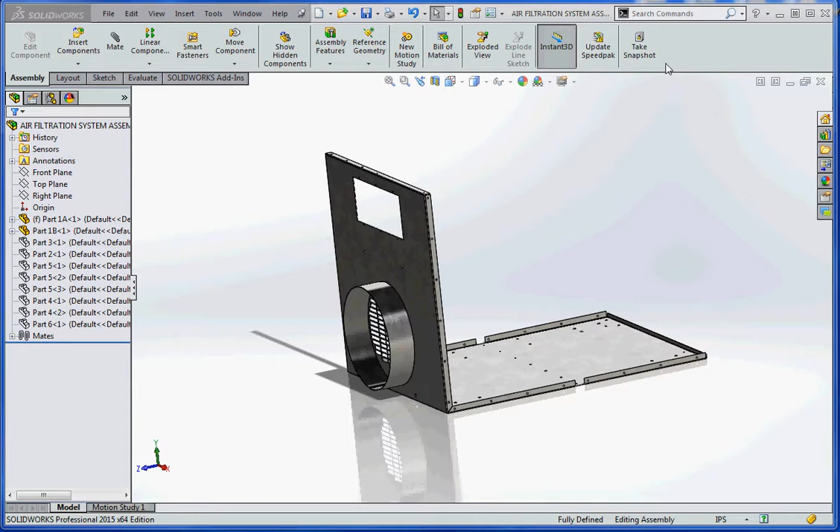Hi Matt, we're back. This is a video of the Air Filtration System Assembly that I put together and sent to you a little while back.

I just want to show you some of the parts and how I put this together. I think you've probably seen this part - I put it together a few weeks ago for you and you took a look at it. I went ahead and redid it and put it in SolidWorks 2015 and cleaned it up a little bit.

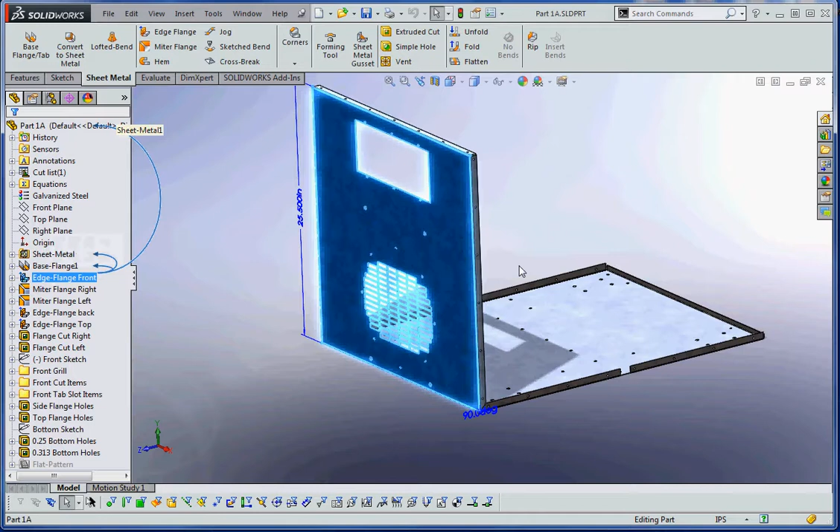I started with the sheet metal part, the base flange down here, then I put an edge flange for the front piece. Then I did a miter flange on both the right and left side to get that in there. I think with the miter flange, it does give you a nice little cut over here.

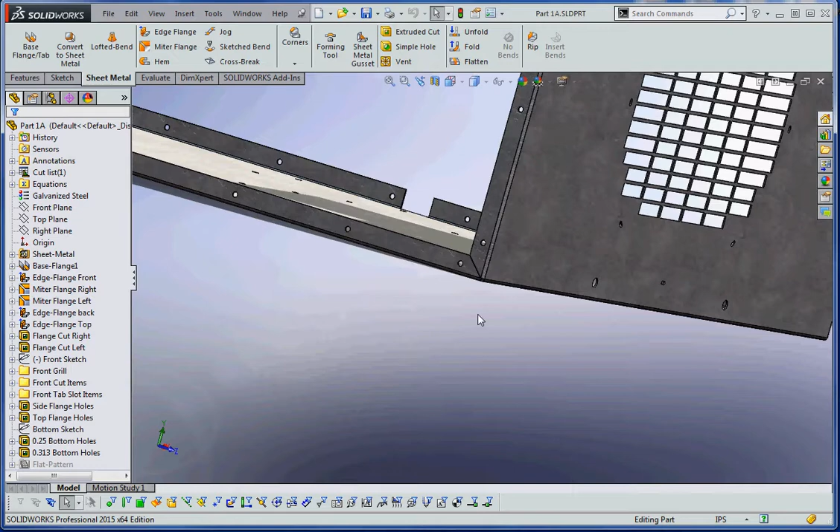I did have a question about how you resolve your holes down here, in regard to the cuts, how you put those cuts in there. There are a couple different ways - you could put an obround in there, or a tear, or some other options, a square cut too I think. So you have to let me know how you guys do those things. I'll try to emulate that.

And then for the miter flange, I did that on the left and right. In fact, we could probably take the rollback bar and roll this back a bit. Boy, that's sometimes hard to pick up. I don't know if you have that difficulty, but yeah.

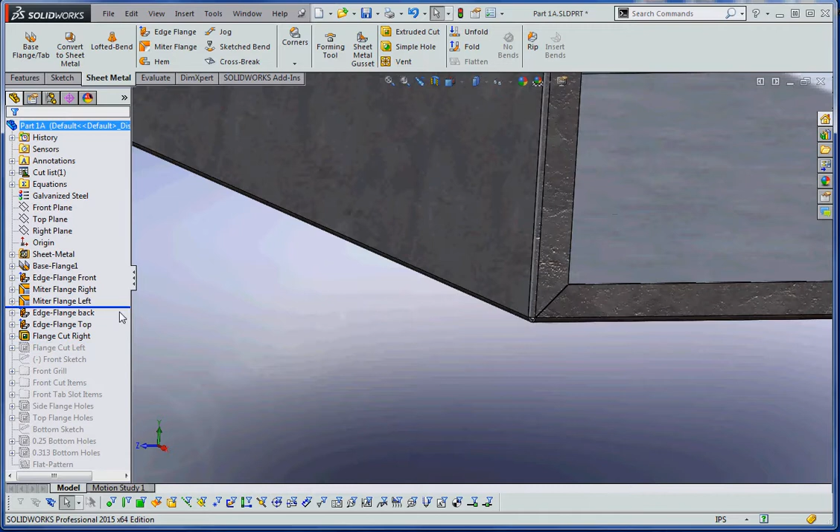So we'll start with the miter flange, and from that we have our edge flange in the back. I went ahead and created that, and I think that provides just a little bit of a dam back there to keep whatever - I think that face you're going to put back here, some sort of filter screen - I think it keeps it from coming back in there.

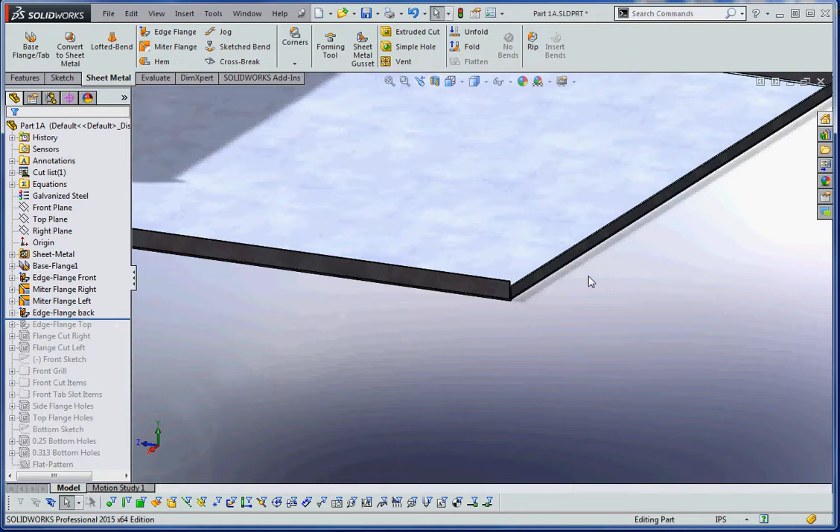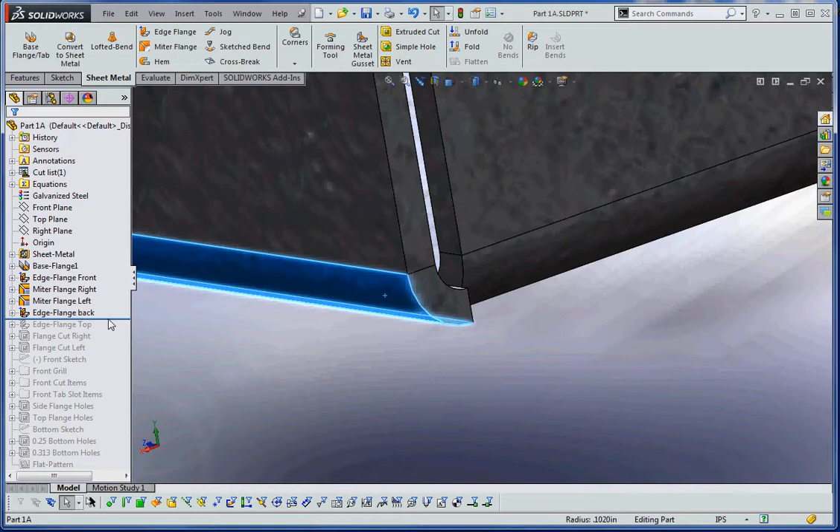That's pretty basic. Again, if you have an idea on how you resolve some of these corners, let me know. Right now I think that one's just a simple tear, so maybe an obround in there or something different might be appropriate. I also borrowed the bend radius in this from that other part I made a video on, which I think was 0.102 inches.

One thing I don't have with this assembly is I don't have Excel loaded yet. I think I might need to go out and buy another copy of Excel since I have it on the other computer. But I need to get that loaded, and then I can go ahead and use the gauge tables for that. So I just borrowed the material thickness for this and actually just entered that manually.

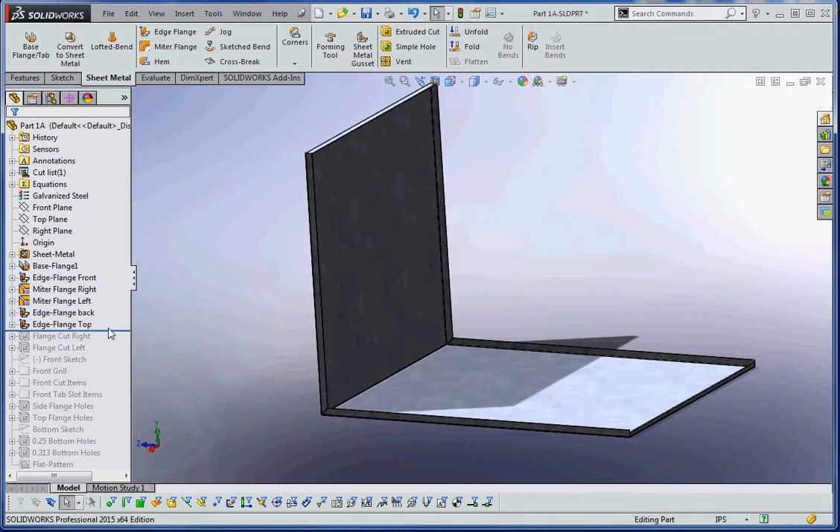So we have the edge flange here, the edge flange in the top. Typically what I try to do with my parts is orient it so that the parts are in an orientation you would normally see it in when it's being put to use. So I'm assuming this is the front, this would be the top, and underneath that would be the bottom. I designed all the parts so that when they come into the assembly, they all have the same orientation.

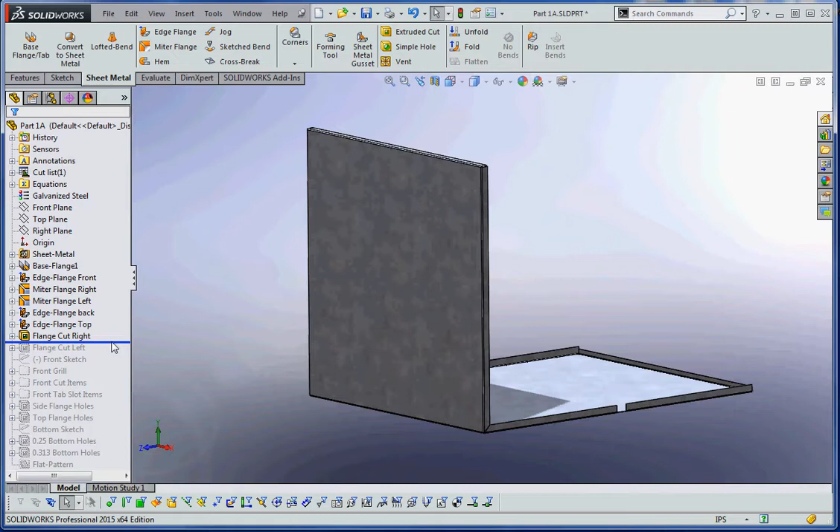Sometimes I use that criteria, and sometimes another criteria would be how these things are laid out in drawings. Sometimes having the top view, right view, or front view may not be appropriate for the part you're showing in a drawing if it has different orientations. So you have to let me know how you do that and how you want these things laid out, but that's the criteria I use for this assembly.

So from that I made a cut over here for my flange cut right, and I made a flange cut left.

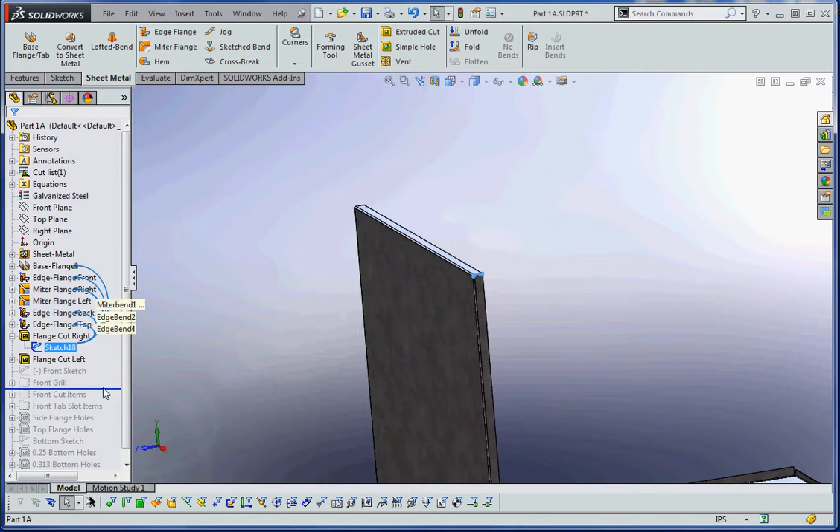Now that's two different features in here, but I could have just borrowed that sketch and cut it all the way through, and I think you did that with the other part. I did that in other elements here too. But I think what got me tripped up was this cut up here on the top, which is the reason why I have a left and right version. I do like to label these. It only takes a few seconds to do, and it might be more instructive when you're putting your model together and somebody's trying to look for a specific feature they want to modify. If it's worded, that could be convenient. But then again, it costs time, so you have to let me know what you like to do.

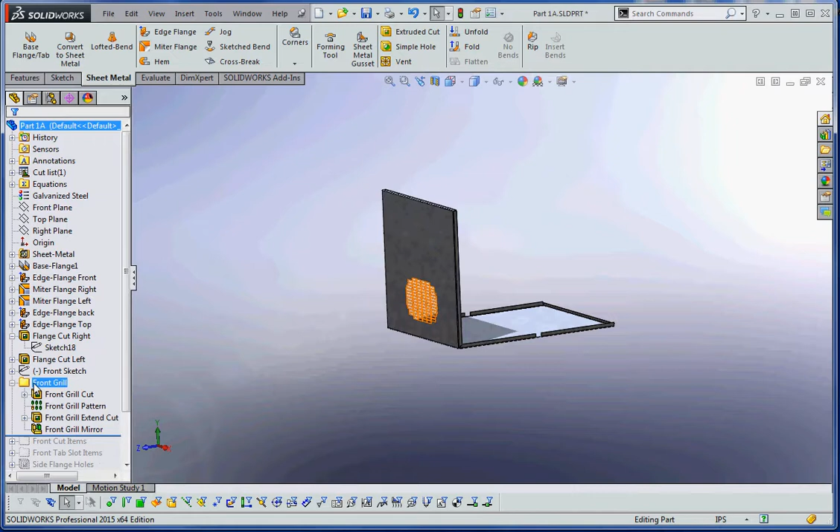Front Grill, I put that in one folder here, so I kind of did what you did. I started with, if I can get that rollback bar to work right, I started with one feature in the bottom down here. If I could show you the sketch and how that was put together. I think I have the sketch here with our front sketch. That's probably what we should be looking at.

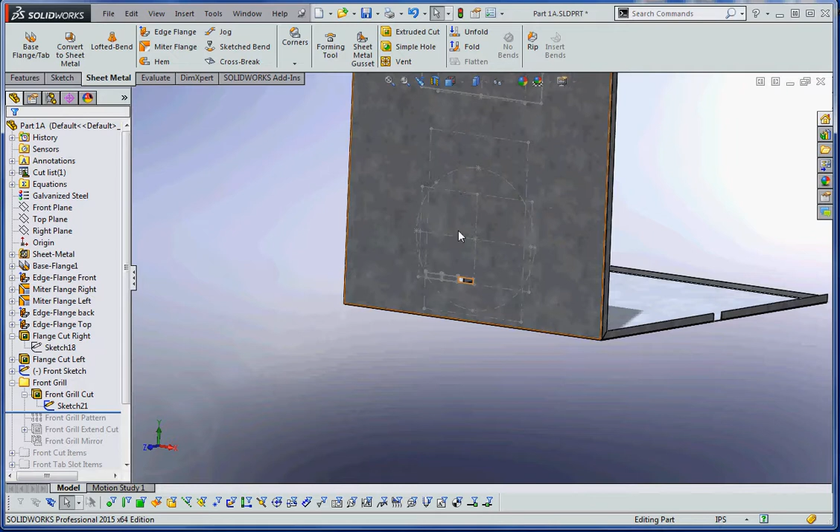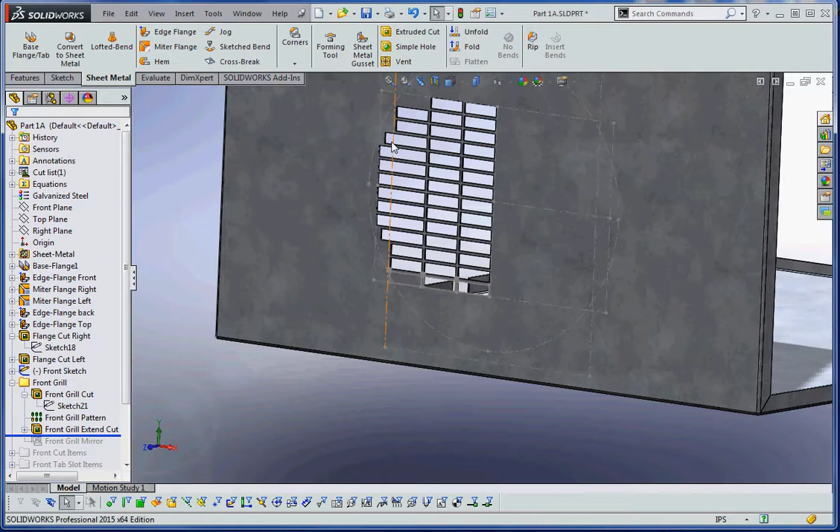So I sketched out the geometry just like you did, and then I started down here. From that I'm going to go ahead and make a linear pattern out of that. So I put my front grill cut in there first, then I laid this out on one side, and then I completed that on that side just by extending what was already there, to I think one was 2 inches and then 2 1/4 were the others. Then I went ahead and mirrored that over to the other side. So there's no real easy way to do something like this. It takes a couple different features, it looks like, and you did that with your part there too.

So the front cut items, then I went ahead and borrowed my front sketch. With a front sketch like that, it's a one-stop shop, and if we need to go in there and make some modifications to it in order to drive some of the other features, we have that available. So you just go to one place for that. Now let's go ahead and take a look at the front sketch too real quick.

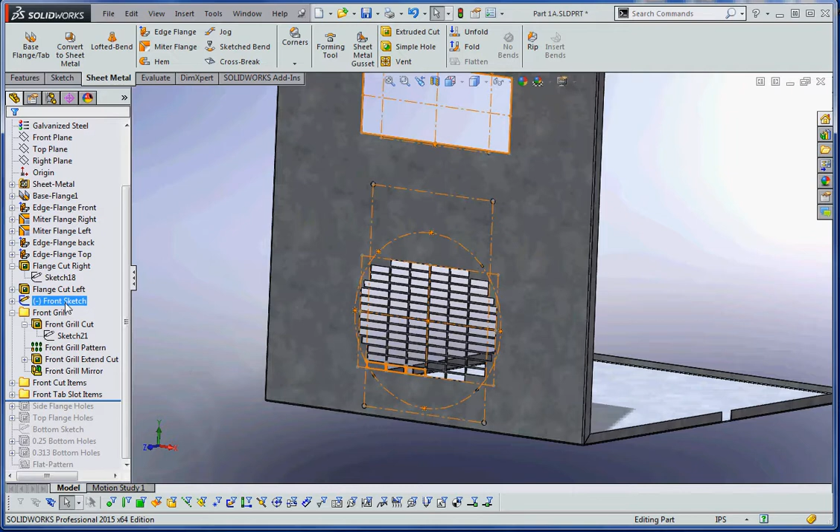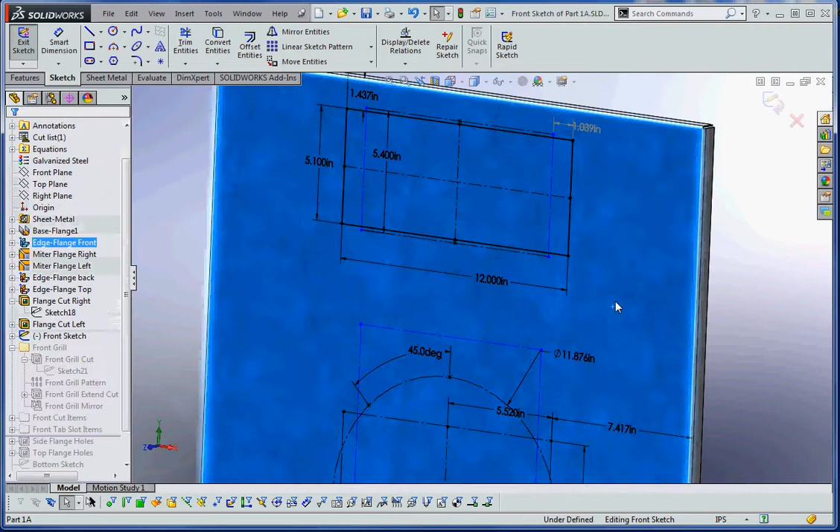There were some elements in here that were under defined, so I just made a guess on some of these. These could be changed, so any of the blue lines could be stretched around, and pretty much what I did here with the front sketch is I just put in either points or the edges of rectangles in order to define where the holes are going to go in subsequent features. So if we rebuild that, then all the other cuts that were associated with those holes in that front sketch follow suit there.

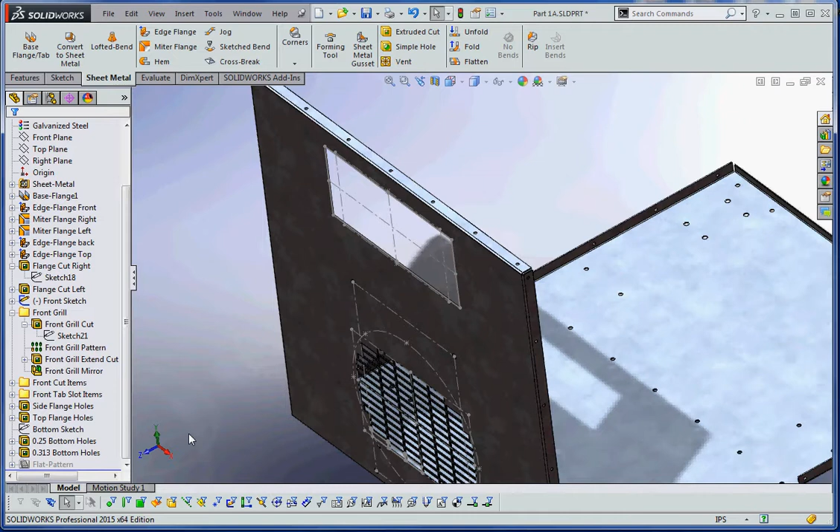So then I put in my side flange holes, top flange holes. On the top flange up here, there are holes up here too. I pretty much borrowed everything that was on the drawing. And then ultimately we have our flat pattern, of course, in there. And then that part's ready to go.

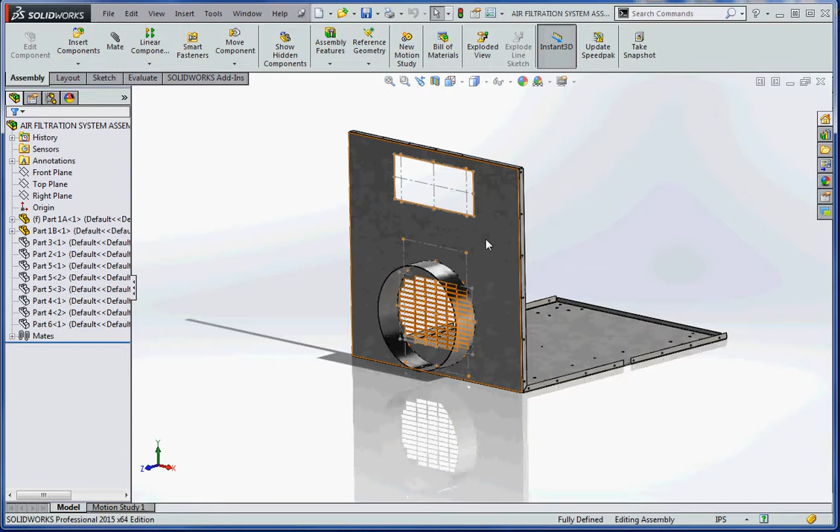So one thing to keep in mind about this part when I put it into the assembly is I make sure that the first part I put into the assembly, which is going to be my part 1A, the one we were just looking at, I try to line that up, and you probably do this too. I just line it up so that the origin of this part is resting on the origin of the assembly, and then all the planes line up. What I try to do is maintain that symmetry for some of the other parts that come in there. For instance, with our part 1B, I made a relationship, in our mating relationship, I made it a coincident relationship. Oop, not with that one. Yeah, let's see.

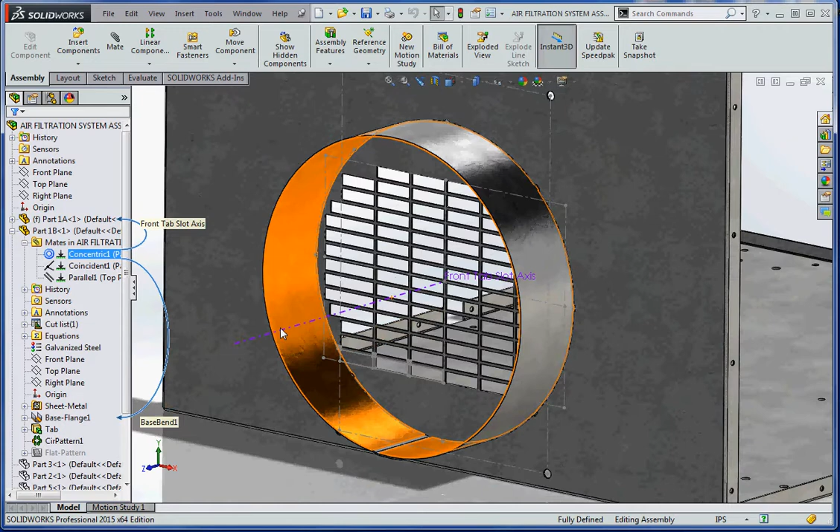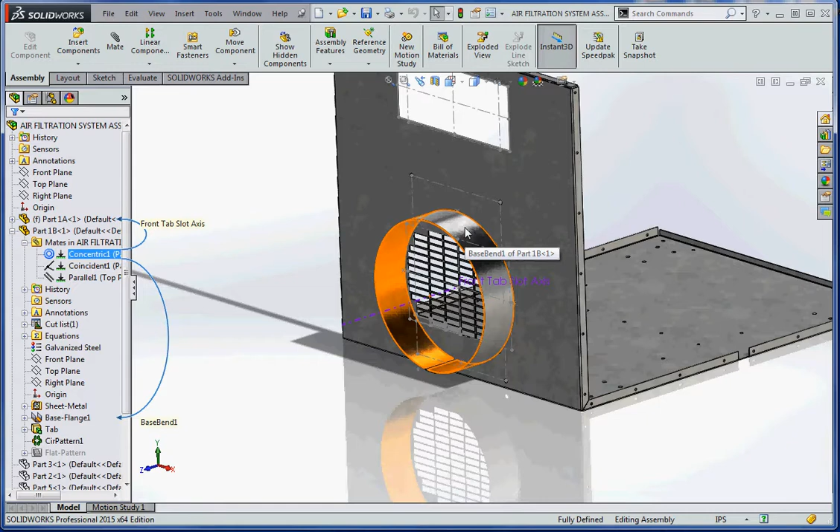I made it concentric because we already had some concentric features, some circular features with our sketch in there. So I went ahead and put in some reference geometry for that, so we could actually line these up. I put in an axis, then defined this edge of this circular feature, this sheet metal part that's sticking out here, and lined those up so it comes in nice and even.

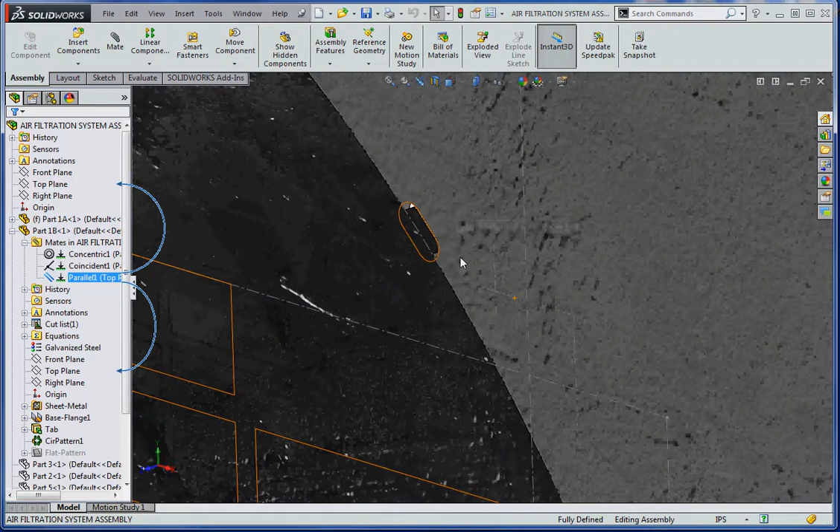I also put in a parallel relationship with the top, so the top plane of this circular feature, part 1B, is parallel to the top plane here. That lines it up so the geometry of the holes we cut and the geometry of the tabs in that part line up real nice. In fact, they're in the exact same location. Everything else after that is a coincident relationship between the back of part 1B to part 1A.

So then the other ones, I did something very similar, part 3. Let's go ahead and take a look at that. I lined up the right plane with this, so the right plane of this part is mated to the right plane of the assembly. That was the first thing I did.

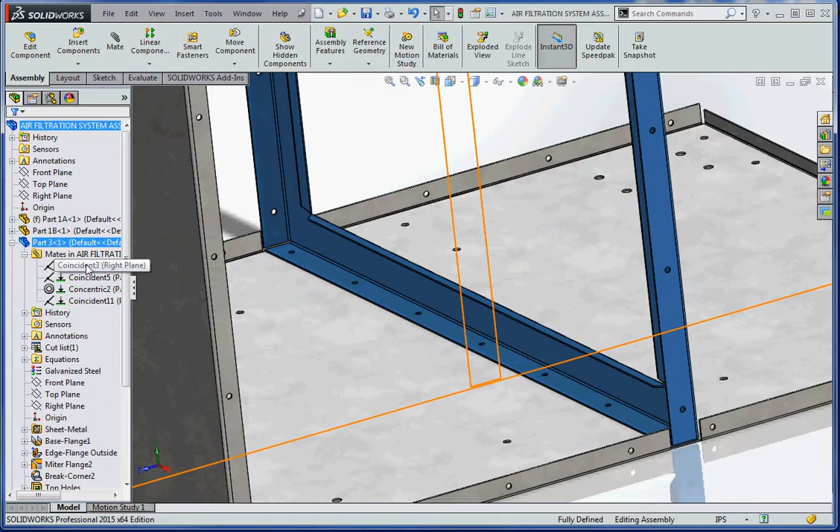And we have a coincident relationship at the bottom, and then a concentric relationship with one of the holes. I think it was anticipated that these holes are going to be lining up, so you want to make sure that they do line up. But in some circumstances it didn't always do that, so there's some modifications that need to be made to this part.

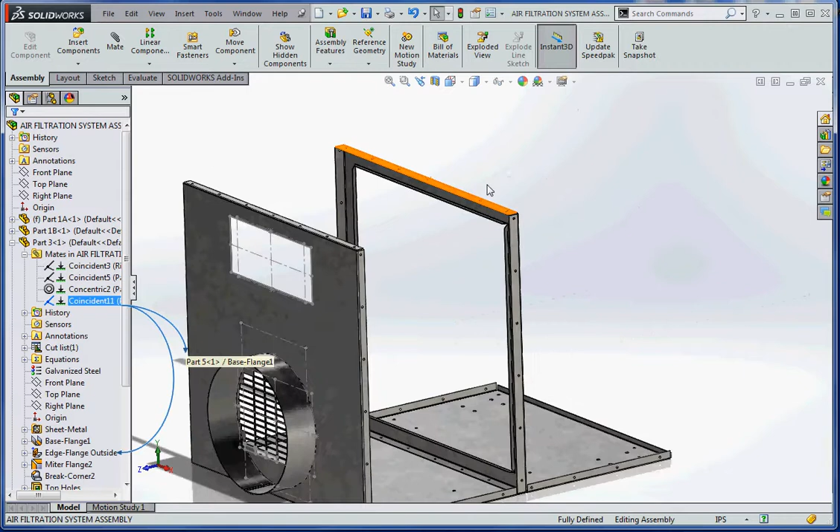Then a coincident relationship to the top. Of course, that comes later with some of the other parts we have in there. So that's typical of some of the parts I put in here. I try to maintain that geometry, trying to line up the planes that we can. Since those planes are available for mating relationships, I go ahead and use those.

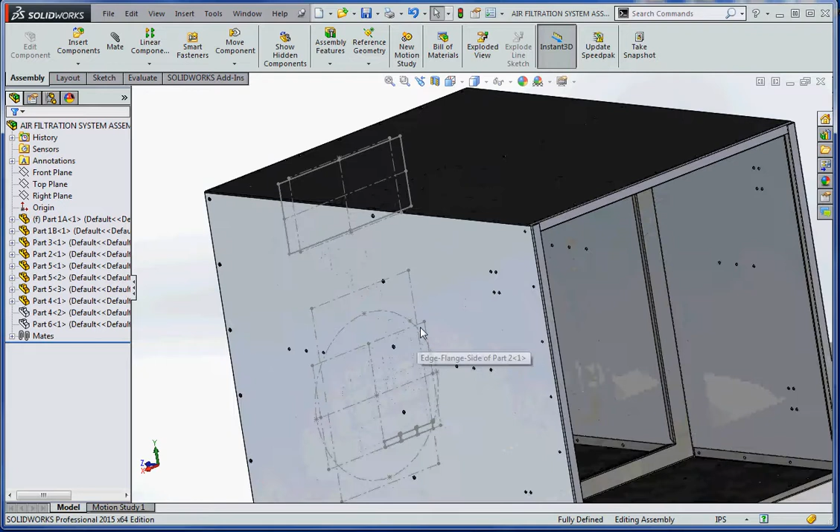I assign materials to our parts, and we might also go ahead and take a look at some of these other ones too. As I mentioned, some of these holes don't quite line up, and I think before I make any changes here, you'll have to let me know what part actually prevails here.

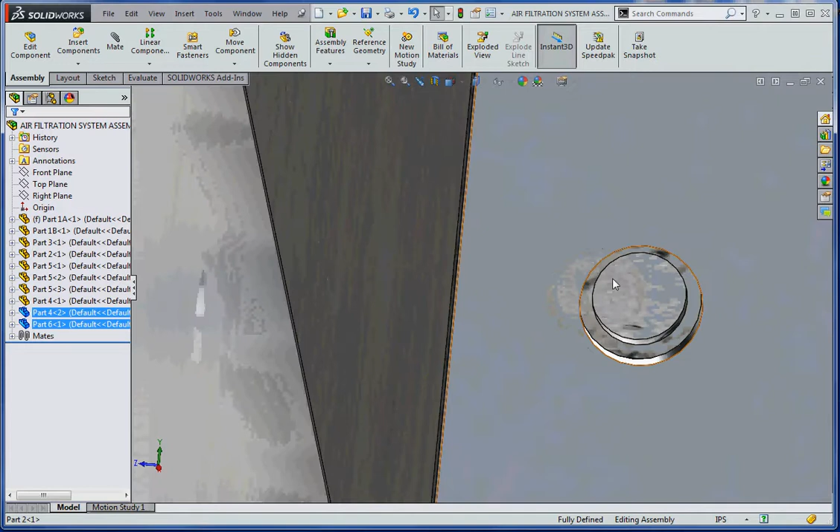These holes don't quite line up here in the middle, but they do line up fairly well on this front part of the assembly. In the back too, I think they line up because I think we use a mating relationship in the back, since those parts kind of float to this face.

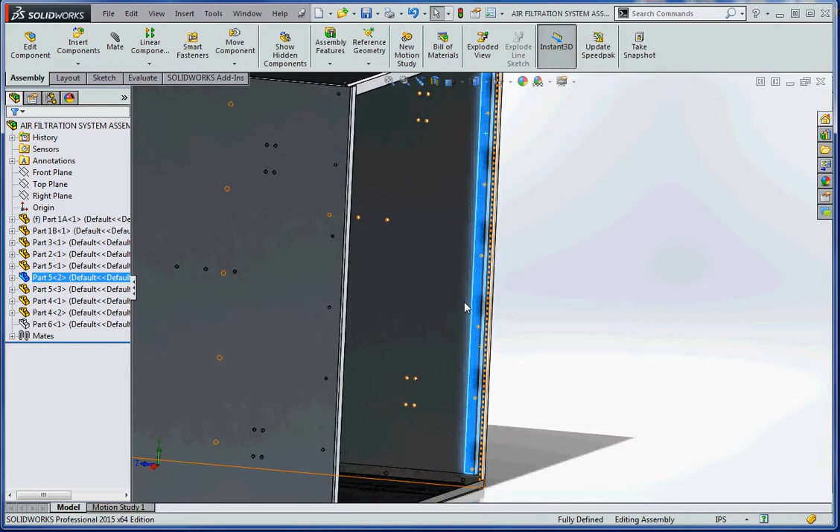So they have that part, not certain what the name of that part is. We could probably hide this and go in there and take a look at it. But there's 3 elements to that part, or part 5, and I think the only reference it has is a coincident relationship between the back end of that and this front face of our part 1A. Then I just made sure the holes lined up, and it actually came together pretty well.